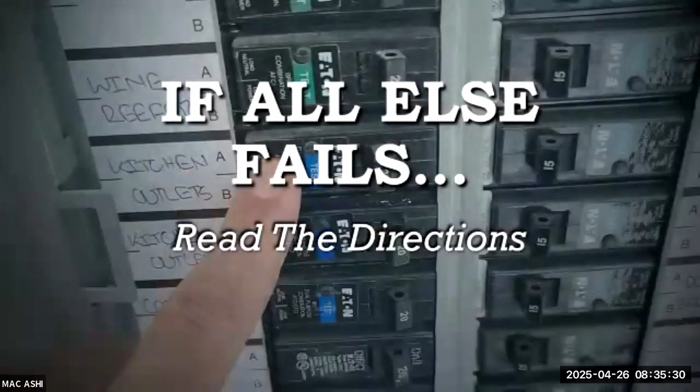I actually got this from reading the directions on a door manufacturer's set of directions. And I thought that was so funny. And when I told my wife about it, she was like, well, hopefully there's no men sitting in the class. Right? Men don't read the directions on things. And I don't like to read the directions on things either. I like to just do stuff. I assembled one of these today, and Hollis was like, oh, you installed it backwards. Hollis, should the PowerPoint be on this one as well? Okay, cool.

So anyway, the directions. Who here reads directions? Okay, show of hands. Yeah, when you have to. One common debate in home inspection is, do you do on-site reports or do you do them back in the office? One of the big reasons I like to do them back in the office is I find a lot of the time I want to look something up, whether it's a code or an installation guide or something. So I find reading the directions has helped my business, has helped me be a lot more accurate and find the answers to things.

So we'll go over some goals here. What we're trying to accomplish here this morning is learn examples of installation requirements for systems frequently seen on inspections and gain familiarity with reading manufacturers' installation requirements.

I have noticed, you guys know Mark Parlee, the building consultant, great guy, awesome speaker. I went through an adhered manufactured stone veneer manual with him, and he was so good at reading it. He was better than I was because he's been through all these lawsuits, he's combed through them. I must say, reading directions to me is a skill. You would think anybody can do it, but the more you do it, the faster you are at finding the places you want to find.

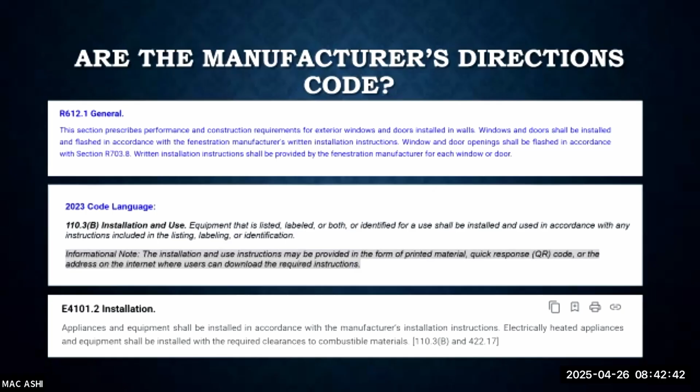Yep. So instead of the township stepping in or the code inspector stepping in and saying, this is how it has to be done, they're saying, just do it the way the manufacturer said. Yes. So the question that has come up often is, does that suggest that we know more than the township because they're just saying, just do it the way the manufacturer recommends? So it was an argument that has come up several times, and I'm just curious to know what your thoughts are.

Yeah, so the question, to summarize, I think, is that you can get in this trap where the builder will often say, well, the county approved it, or the so-and-so approved it, so that means it's code. I kind of bow out of that. I mean, if it's in writing, this is exactly why I would go to the directions. If they want to say that, that's fine, but I can back my opinion up in writing, and they probably can't. So one of my favorite things, whenever it gets controversial and people push back on you, is like, we'll put it in writing.

I did a deck that needed to be rebuilt, and the seller got an engineer to tell me what a great deck it was and that I was a complete moron, that it was the best deck he'd ever seen in all his years of engineering. I said, well, I'm sorry I made such a terrible mistake. Why don't you put this in writing with your engineer's stamp on it and send that to my clients? Oh, well, I'm not really an engineer. And the whole thing just kind of melted and fell apart. So that would be my suggestion if that comes up.

That's the whole point of these directions, is you're backing it up with something that's in writing. Yeah, I've been successful with directions, and products can fail.

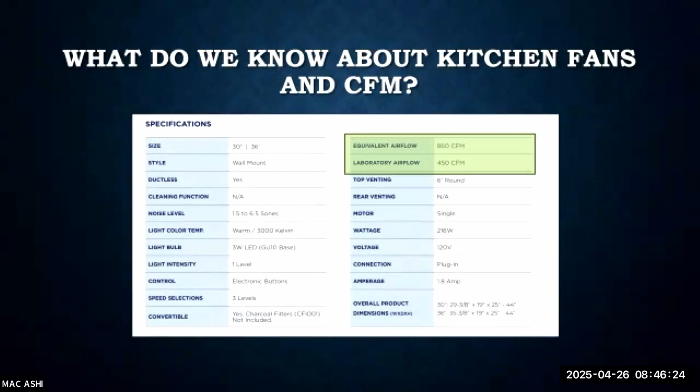We all know what was happening, right? We were depressurizing the house, and so I went and just snapped a picture of the data plate, and I went and looked up the specifications on the internet. It was laboratory airflow 450 CFM, so it certainly had the potential to be over 400 CFM, which is the modern code.

So here's like a trap, right? My mentor, when I got started, said when you're an inspector, you're walking through traps all day long, and the better you get at it, you learn to tiptoe through all these little pitfalls. But it's kind of tricky on a 1980s house to apply modern code to it, isn't it? Right, so you can't really do that.

So in my report, I listed it as a due diligence item, but at the same time we were having a problem—this is an 80s condo, they weren't bringing in makeup air. So you turned the fan on, it depressurized the building, and you started pulling air down the chimney into the building. This is why we changed the code.

So it's kind of cool when you actually see the evolution of why we make codes and why we change these things—putting the unit under negative pressure is not really great for it. I don't know what they ended up doing with that, it was just this little rabbit hole I went down. But I was able to use the code and the data plate to make my point—this is why we do this today. And if you don't want to smell your fireplace, you might need to think about doing makeup air.

So anybody use due diligence in their reports? To me, it's a way when it's not really clear—it's like, well, you can research this yourself and figure out what you want to do with it. Maybe you love the smell of creosote in the morning and you're okay with it, or you don't use the fan, or there could be a lot of reasons. So to me it wasn't necessarily a repair item, but I wanted to be clear about what was happening when you smell the fireplace.

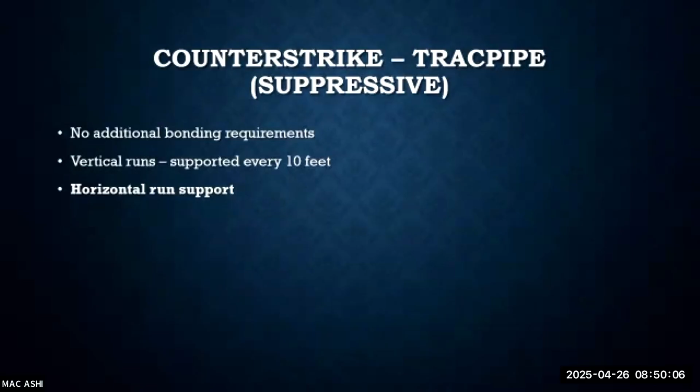So the CounterStrike made by TracPipe is the suppressive, no additional bonding requirements, vertical runs supported every 10 feet, horizontal runs as well. So support is something I often see inadequately done on CSST, and you can look in the directions and see how frequently you're supposed to support the CSST.

So this is where things get tricky, is minimize removing the jacket. So using a utility knife, strip back the jacket, see the table. Care should be taken to minimize the amount of jacket removed. How often do we see lots of the jacket removed? More often than not, right? How do we know they haven't removed the jacket in places we can't see it? No clue, right?

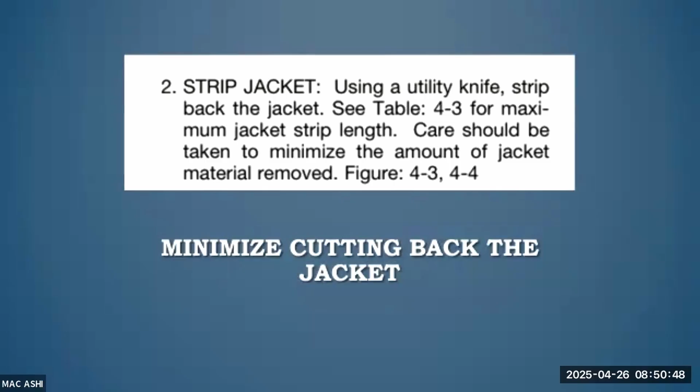All right, so here's a picture of that TracPipe. This is a really interesting one. Exposed stainless steel that may come into contact with spray foam insulation must be wrapped in self-bonding silicone tape. Are we going to see that one? No idea, no clue, right? But this is a really interesting thing.

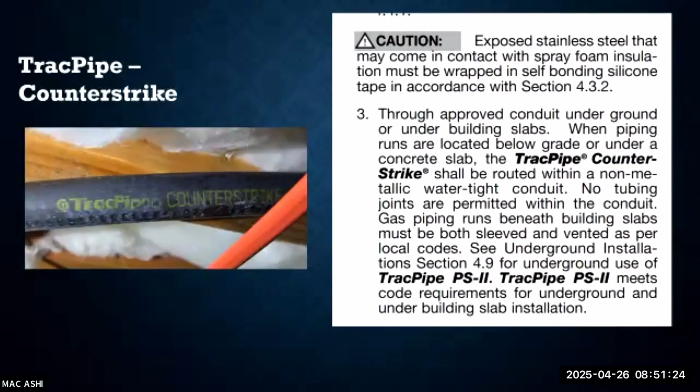I partly bring this in about reading the directions because now when we show up at a house, there's like millions of products and they're all layered on top of each other, and we don't always know whether they're compatible with each other. So compatibility is one of those things that I'm actually kind of often scanning for when I am reading the directions. So I thought that was an interesting one. Probably not much help because we can't see that, but I thought that was sort of interesting.

So it runs through approved conduit where underground. So if you're running this stuff underground, runs located below grade or under a concrete slab shall be routed through non-metallic watertight conduit. So if you are seeing this run underground, you can open the directions and see what it says about how you're supposed to run this underground to make sure it is done correctly.

It can be installed outdoors, but protected from physical damage and not buried directly in the ground. Don't know what's going on with my audio there. So this is interesting. TracPipe CounterStrike jacket is resistant to UV and able to withstand exposure to long periods of sunlight.

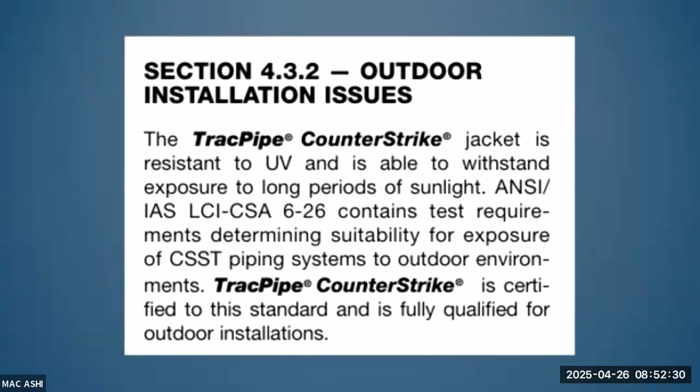CSST in outdoor systems is certified to the standard, so it can be installed outside - that's basically the gist. It's not subject to physical damage when it's on the outside. So if you see CSST that could be physically damaged, this is where you'd find in the directions the proof for your point.

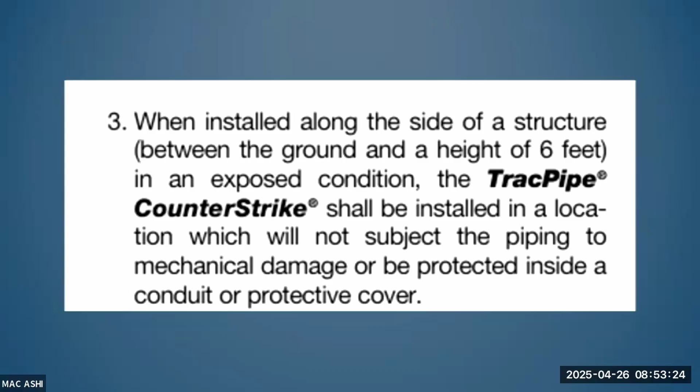Have you guys ever had the occurrence where you're inspecting and something just intuitively doesn't feel right? You think somebody could drive their car into the CSST. If you just say 'I don't like this,' you're defenseless if somebody pushes back. Whereas if you open the directions and read them, copy and paste that little nugget in, then you've got the directions backing you up. They provide great cover for you when you have these opinions.

So I hope that helps - I'm just giving examples of how you sift through and find these little nuggets. This was an inspection I did, and I noticed yellow CSST that wasn't sleeved very well. So I went and found the manufacturer - this is from Gas Tight.

Masonry material is defined as including but not limited to brick, concrete, mortar, stucco. When necessary to install Gas Tight through masonry, the tubing should be routed through a conduit that is half inch larger outside diameter than the CSST - basically it should be sleeved. So clearly, based on the directions, what I saw seemed wrong.

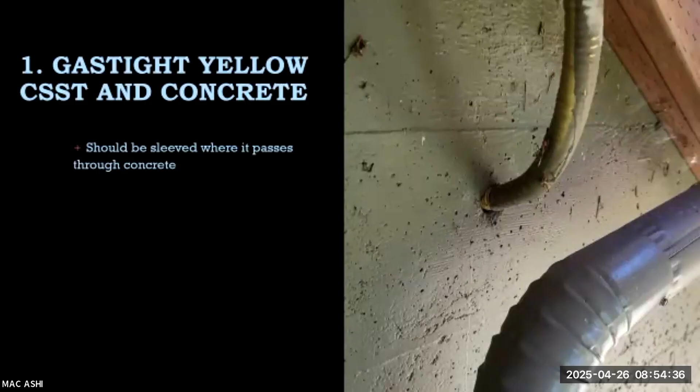I do think this varies per manufacturer, so I can't stand here teaching that whenever CSST is in concrete contact it's wrong, because some manufacturers may allow it. That's why I thought CSST was interesting to go through - unfortunately if you really want to get it right, you have to look the directions up. It's too complicated; you can't just memorize one set of rules and assume it's all the same. I wish things were simpler, but anyway - half inch larger diameter sleeve.

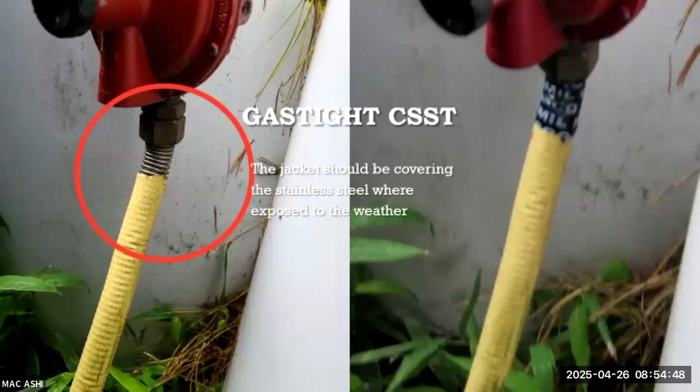You must run into this a lot, right? On the exterior, when you see CSST, they've often stripped the jacket, and it should always be covered. That's actually universal in every set of directions I've read - though you might want to confirm, since I can't read every manufacturer's directions. But from what I've checked, every manufacturer says if CSST is on the exterior, you've got to cover that stainless steel. That's an easy fix. But you guys see this a lot? I do where I am. This comes up all the time. Yep.

The TracPipe jacket is resistant to UV. When installed outdoors, the plastic jacketing shall remain intact as much as practical. Any portions exposed shall be wrapped in self-bonding silicone tape. So they've told you exactly how to fix it.

This is the kind of thing I don't have to look up every time - to me, this is why God made software. I can find this stuff, look it up, put it in my template, and now it's there. I've snipped the directions in, and once you look these things up once and use your inspection report software to store all this information, it makes me smarter, faster, and more accurate.

That's a really important component of using the directions - I don't have to look it up every single time. I got in the habit years ago of reading these things, and I've accumulated this knowledge. What that means for me as a home inspector is now when I go out in the field, I have a second brain on this device. It's got all these little clips, all this knowledge built into my report template, and I'm smarter than somebody who hasn't done this.

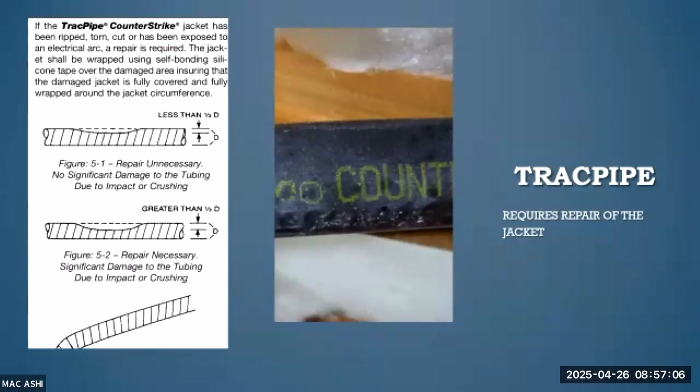So CSST special bonding - I like to call it special bonding because gas piping always requires bonding per the National Electric Code. All metallic systems in the building need to be bonded. For the most part, the steel stuff was all done at the appliance. If you connected it to a furnace and it had a grounded circuit, then it was all part of that bonding system. So the gas pipe didn't require special bonding.

The CSST, which is arguably, in my opinion, just a lousy product, now requires special bonding. And the frustrating thing is, who installs the bonding? Probably the electrician. Where is it in the NEC that they should be doing this? Nowhere. So you have a subcontractor in charge of installing bonding for a material that has absolutely nothing to do with the National Electric Code. A lot of electricians push back on it and don't know about it or don't care. So you have to try to get the electrician to care about gas pipe, right? That's kind of frustrating.

But the yellow CSST should always be bonded with number 6. Counter-strike, the suppressive type, does not require special bonding, but you have to repair the jacket. And to me, if I were king, I would make all CSST have to be bonded because I can't tell whether the jacket's damaged somewhere. You can only see a tiny little part of this stuff, right? So this is a needle in a haystack for us.

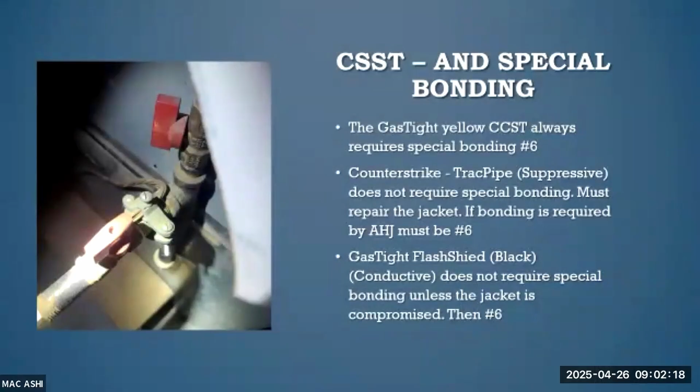Hey, we're doing pretty well with CSST, right? So far, so good. All right, cool.

This is just a picture of the FlashShield, the conductive type. It has this sheathing that goes on it, which is how you can tell it. Sometimes you see cool illustrations in the directions that help you understand how the product works. This is a cool illustration showing that metallic shield meant to go over the flash shield stuff. I like the directions because they help me learn more about a product.

Who here knew there was a conductive and a suppressive type, or whatever those two types are called? I saw black CSST for years before I understood there were two different types, and I figured that out by reading the directions. You learn stuff when you start digging into these things.

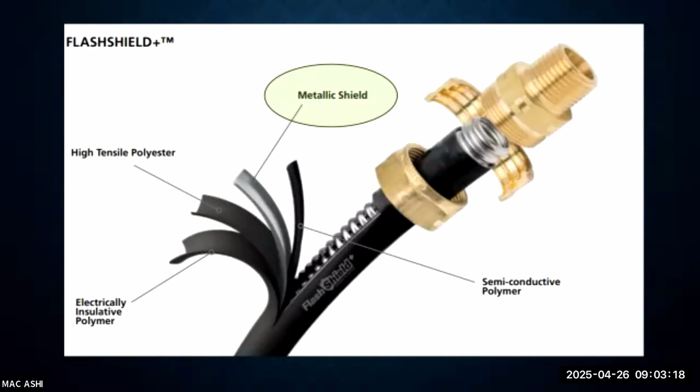And this is the gas tight. They've got all kinds of stuff on the special bonding that's required, and they're showing the clamp and so forth.

If a tear in the outer jacket is less than half an inch in length, gas tight recommends wrapping the tear with electrical tape or self-bonding silicone tape to protect the metallic shield layer. If the metal shield layer tears greater than half an inch, it must be cut and replaced using appropriate methods. The affected area of greater than half an inch metal shield tear cannot be cut out and replaced. The system shall be treated like yellow gas tight with regard to isolation and separation requirements. So if you have damaged this metal beyond half an inch, it should be treated like the yellow and bonded with the yellow CSST. I'm just trying to show you where I found this stuff and how I came to my opinions about this. Good little nuggets.

This is an interesting one: it must only be installed by an installer who has successfully trained through the FlashShield training program. That can be really helpful, right? If someone's pushing back on you, has anybody seen some of these where they're not sure they've taken the class? I've definitely seen some of that. So you could put this in your comments. I don't think I have this in my library yet, but that might be something I could add to my library of pre-made CSST comments.

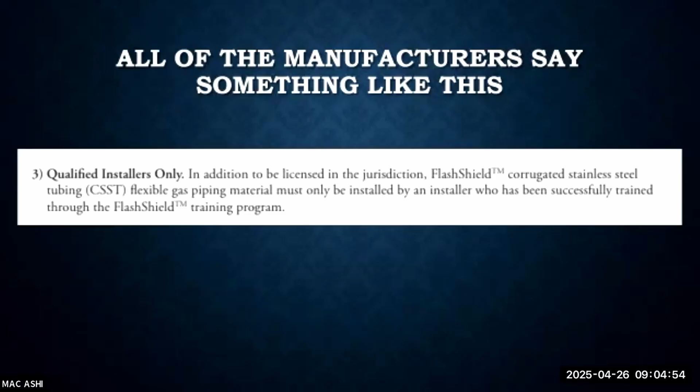How about that? We made it through CSST. Did everybody survive that? Cool. Yeah, good stuff there.

So, error codes - who looks up error codes when they see them on appliances? This is an easy one, right? It's just sitting there, sometimes flashing at you. It's like the appliance is telling you something. Let's look it up and figure it out.

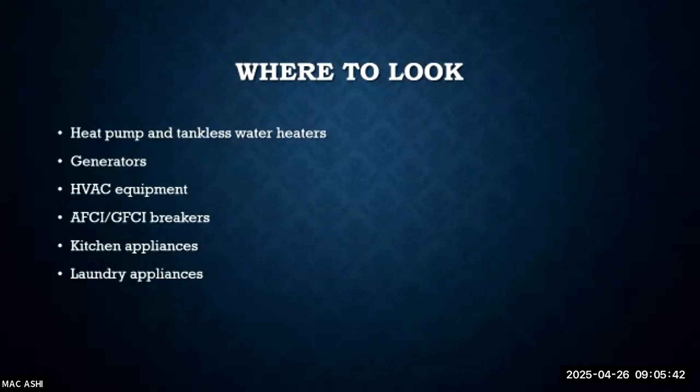Different appliances where I'm looking for error codes: heat pump and tankless water heaters, generators give you error codes, HVAC equipment, AFCI and GFCI breakers, kitchen appliances, laundry appliances. Anywhere you see any kind of LED light, sometimes they're just flashing in a sequence, sometimes it's a display with some weird gibberish, but either way you can look it up and see what it's trying to tell you. They often are completely inscrutable - I don't even know what the heck this is, but I saw that and thought to myself, something might not be right.

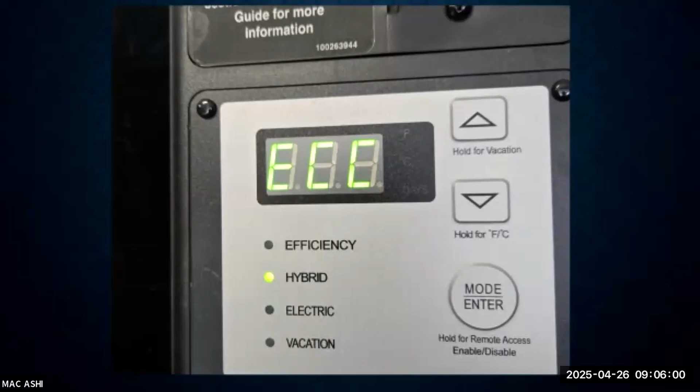So I did the unusual thing of looking it up and found the directions: ECC, heat pump compressor is not functioning. That's a pretty good thing to know, right? That'd be a bad one to miss and then have the client move in and find the heat pump not working on the water heater.

You guys have heat pump water heaters out here? We have quite a few of them. I like to get a video of the compressor running, so I go in and run hot water until that thing kicks on, and I have a video of the compressor running to prove it was working when I was there.

I'll even put it in heat pump mode, because sometimes people have disabled it and it's not in that mode. So I put it in heat pump mode and turn on hot water to see if it's running. I can obviously tell the water heater is making hot water by testing the temperature, but with these I like to make sure the heat pump itself is working.

You guys see that? Good little tip, can kind of help save you. I've found a lot of these not working over the years where there's hot water, the elements work, but the heat pump part of it is not working, or at least didn't respond to my operating controls. I might not say it doesn't work.

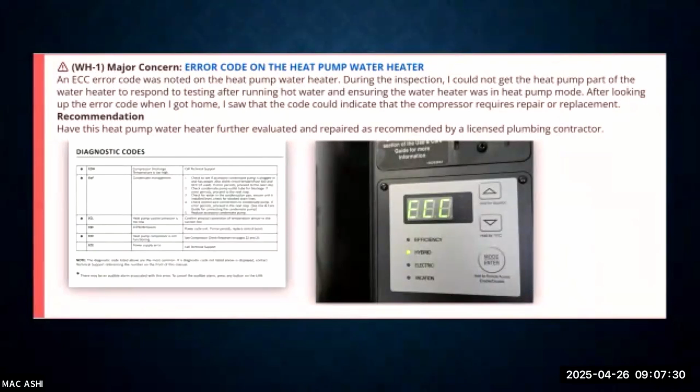But in this case, it was a slam dunk. I just got a screenshot of the diagnostic code and put it in, and the client was really grateful that I found the heat pump wasn't working on the water heater. I fussed about this one because I couldn't get it to come on, it gave me the error code, and I thought they should have it fixed.

Composition roofing. I've been driving around since I got here and I can tell you guys have composition roofing around here. Let's dive into this one. So this is one of my favorites.

Remember we talked earlier about the idea that you go out and it doesn't feel right. Who here feels like it doesn't feel right when the upper downspouts drain onto the lower roof? About 50%, something like that. Anybody been to the Grand Canyon? Water is some ornery stuff, man. You do want to control that, and running it onto the roof will damage the shingles prematurely.

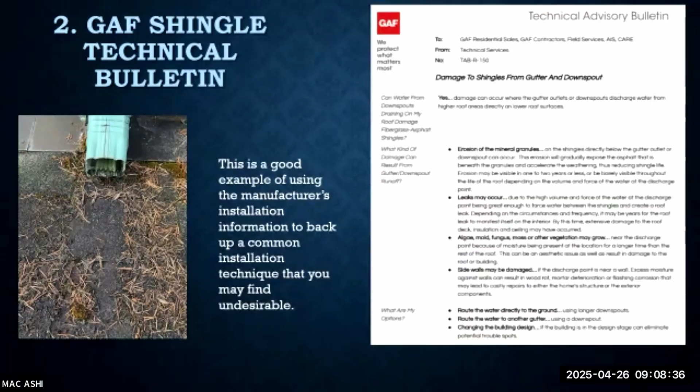So the problem is, if I call that out and say you should fix this, do I have any real backing for it in the building code? Not that I can find. And if you go to a new construction cul-de-sac development, every single house has the upper downspouts draining right onto the lower roof. So you're tilting against windmills here, you're Don Quixote out in the wilderness with nothing to have your back.

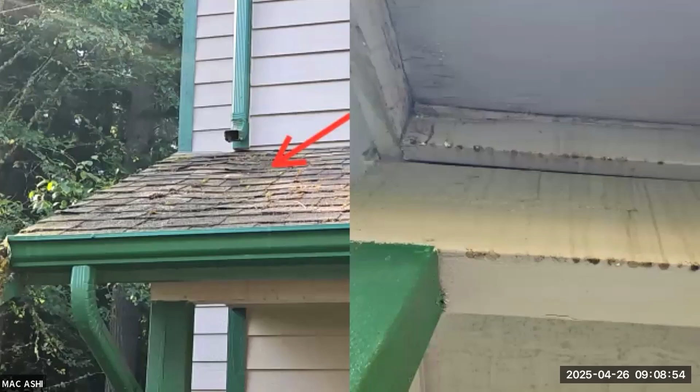My buddy Charles Buell made this nice illustration I love. We include those in our software, Scribeware. But I always have that in my comment. This isn't my first rodeo, I've done this a lot. I know what happens if you let the upper downspouts drain onto the roof for 20 years - that becomes the first place the roof fails, isn't it? Am I wrong? Right, so I know this.

So when I see this and it's not bad, I'm going to use GAF's technical advisory bulletin. Most manufacturers have technical bulletins you can find that are really helpful, and in this case their technical advisory bulletin is actually worth reading.

The shingles directly below the gutter outlet or downspout can erode. This erosion will gradually expose the asphalt beneath the granules, accelerating weathering and reducing shingle life. Erosion may be visible in one or two years or less. Leaks may occur due to the high volume and force of the water. Algae, mold, fungus, moss, or other vegetation may grow near the discharge. Sidewalls may be damaged if the discharge point is near a wall.

So GAF kind of has my back, doesn't it? I look at these things as people that have our back - we want to say this stuff, but we don't want to be out in the wilderness, this Don Quixote tilting against windmills.

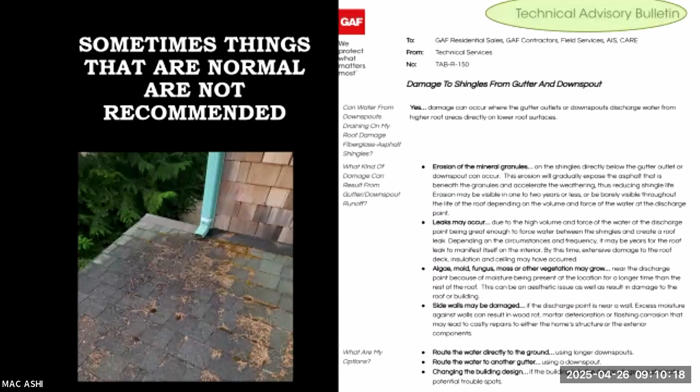I've only seen this like 3 times in my life, but I have seen it out in the wild. And you know who installs these? The people whose last roof looked like that. We learn by pain, right? That's how humans learn. In my experience, the clients that actually extend these downspouts had a roof that failed prematurely, and we're like, yeah, we're going to do this.

I see a lot of them where they'll run the drain for the condensate into the spouting up top, and it runs down across those shingles too off of that drain, and it really eats up the shingle. That condensate water is acidic, so it really eats it up. On an attic mounted unit, they'll run it into the gutter, then it runs down across those shingles, and it eats them up.

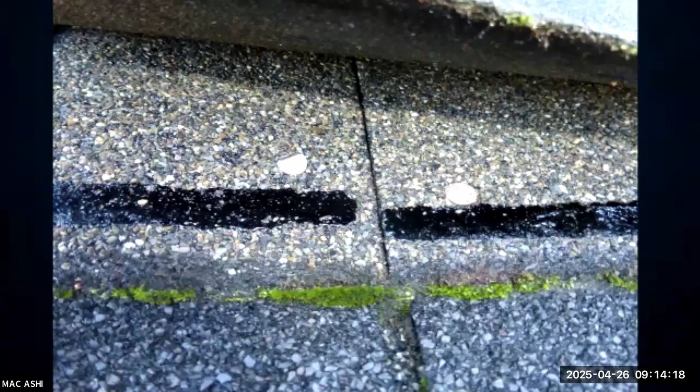But there is a little fastening strip where the fasteners should be located. This is how they most often look in my experience, where they're high fastened, because they don't want to have shiners - so when in doubt, they put them too high on the shingle.

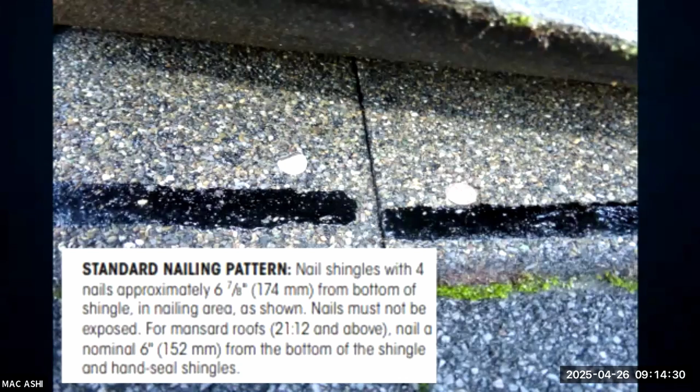Nail shingles with 4 nails. They give you the size of the nails and how far up from the bottom of the shingle. In the nailing areas as shown, nails must not be exposed.

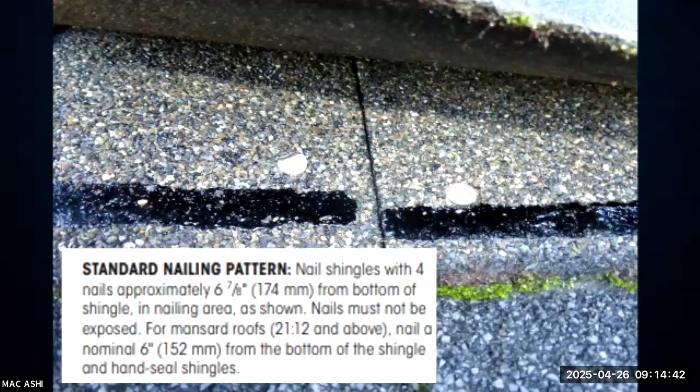Staples were phased out in 2003. Does anybody build that into their report template? I can put it in my template and type in the word staple and it pops right up. That helps me date a roof, since it tells me roughly when it was installed. Most likely, if I see staples, it's older than 2003.

Do you guys see stapled comp roofs here at all? A little bit, but they're kind of going away because that's getting to be a pretty old comp roof, so I don't see them much anymore.

Question in the back: it's hard to tell what manufacturer it is. A lot of times I'll go to the association rather than the general manufacturer, because most associations have installation guidelines that cover all their members. You're talking about the Roof Manufacturer Association? Yep.

Vinyl siding has their own association. The peel and stick companies have their own association too, and all of them have details that all their members agree on. It can get confusing, can't it?

With adhered manufactured stone veneer, there's a nationwide manual I like a lot. But what I've found is that the actual product can differ from the national standard. So I'd argue the product probably trumps the national standard, since that's what you're actually using. I'd be careful with that, because I got into trouble with it on the manufactured stone veneer side.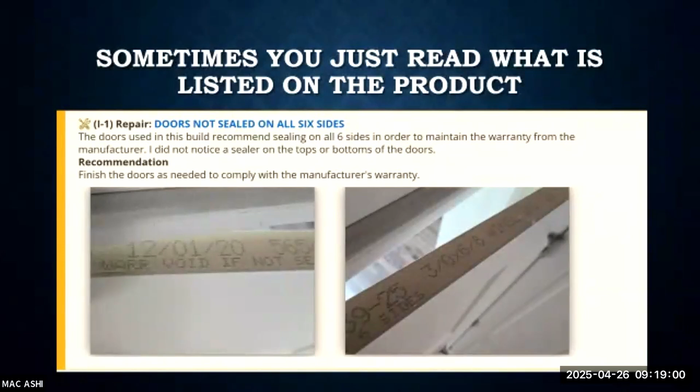But particularly on a new build, I don't usually call this out if it's not a new build, just because I figure no one's going to pull all the doors off and redo it. I'd make a note of it maybe, but I'm not going to call it a repair item. But if it's a new build, it says right on the door to do it, and they didn't do it.

So I don't know, I call it out. Did anybody else call this out? Yeah, I got a couple hands. I don't know, it would look embarrassing if the door is warped and your client read that and was like, how come you didn't say something about it?

So you must have propane here. Guys, not everybody's a urban city person, right? You live out in the country here, you got pieces of land.

So secondary pressure regulators, I didn't even know that was the name of this thing for a while. That was like, oh okay, they call it something that I didn't know. I thought this was really fascinating, not the California cancer thing, but things to tell the gas customer.

I bet that never happens, but this is what the manufacturer put in here. Show the customer the vent assembly and vent lines. Stress that this opening must remain unobstructed at all times. Tell the customer to check the vent opening after a freezing rain, sleet storm, or snow to make sure ice has not formed on the vent. Show the customer the shutoff valve on the container. The customer should close this valve immediately if gas is smelled, appliance pilot lights fail to stay on or appear higher than usual, or any other abnormal situation occurs. Tell the customer to call your company to service the regulator if the regulator vents gas or a leak develops in the system. Only qualified people should work on it.

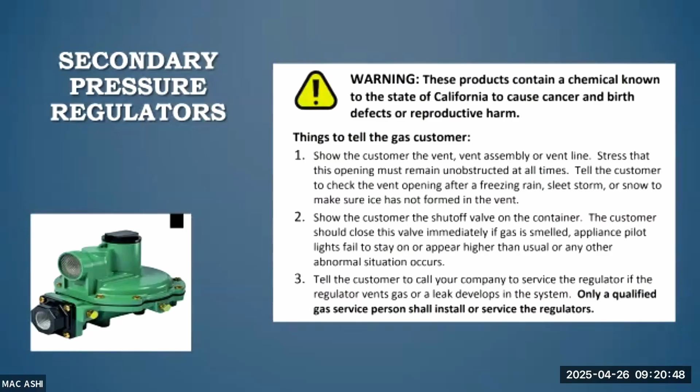Well, that could be helpful, couldn't it? I don't know, I thought it was really interesting that that's in there.

This is pretty cool, who thinks of these as having a service life? Who knew, right? Well, if you read the directions, 25-year recommended replacement life. So there's a life to them, they recommend replace them every 25 years. That's their design of corrosion-resistant materials, both internally and externally, with proper installation. They will meet a 25-year recommended lifespan.

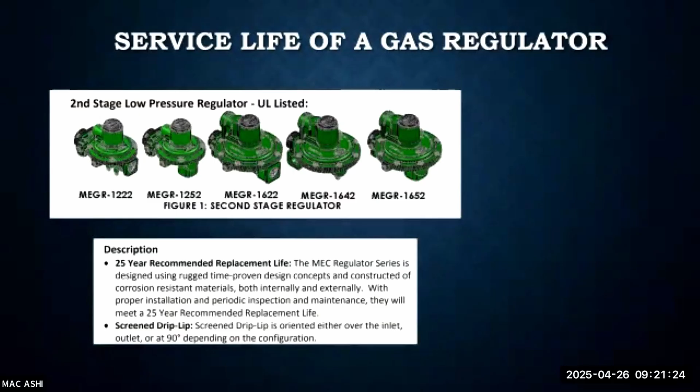Screened drip lip is oriented either over the inlet. Yeah, that's not it. But anyway.

This is a really good one that I see wrong all the time. Install the regulator with the vent pointed vertically down. You guys see this not done correctly a lot? Maybe you don't look. Who knew, right? If you read the directions, it's like, wow, I can't believe this, this is something I should have been looking for and I wasn't. So install the regulator with the vent pointed vertically down. If the vent cannot be installed in the vertically down position, the regulator must be installed under a separate protective cover. Installing the regulator with the vent down allows condensation to drain, minimizes the entry of water or other debris from entering the vent, and minimizes vent blockage from freezing and precipitation.

Cool, I learned something new, right? Again, I hope this is helpful for you guys, but I didn't know any of this stuff, right? Nobody teaches it in the schools really. And so you read the directions and you learn all these things.

It's fascinating to me. Install the regulator so that any gas discharge through the vent or assembly is over 3 feet horizontally from any building opening below the level of the discharge. Below the level of discharge, that's an important one, and not less than 5 feet in any direction away from any source of ignition, openings into direct vent appliances, or mechanical ventilation air intakes.

So clearances can get really confusing, can't it? I mean, sometimes you have a secondary pressure regulator, a direct vent water heater, a direct vent furnace, a crawl space opening. So we've got 3 manufacturers, we've got the building code, all of these things start layering on top of each other. I've definitely had a few houses where I'm like, I really have no idea what's right anymore, because you've layered so many different manufacturers on top of each other. And who starts taking precedent over who?

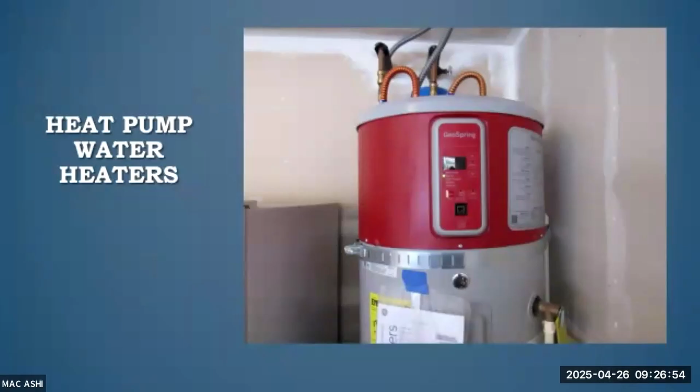Heat pump water heaters - we went over the error code earlier, but I'm glad you guys see these. In location requirements: indoors, so you can't install them outside, vertical and level, that seems fairly intuitive. Unrestricted airflow - they want at least 750 cubic feet of space, roughly 10 by 10 by 8 feet tall. So if it's in a small closet with no makeup air, there's probably not enough air for that heat pump to work right.

Minimum 6-inch clearance on all sides. I very rarely see that, right? They're often up against a wall. Who's going to move that? These are the traps we run into. People get kind of tired of us being picky, but this is a home inspector trap. It says there's supposed to be 6-inch clearance on all sides, and there isn't. I don't know, do with it what you will, but it's right in the directions.

Not subject to freezing. That's kind of interesting. If they're in a garage, which is a good location for them, they could freeze where I am. It's funny, I was just down in Arizona, and nobody puts heat pump water heaters in Arizona, which might be one of the strangest things I've ever heard. I was like, there's so much free heat down here. Why in the world aren't you using these in Arizona? Plus it'd cool your garage for you, so your garage isn't like 150 degrees. But anyway, they don't do them down there.

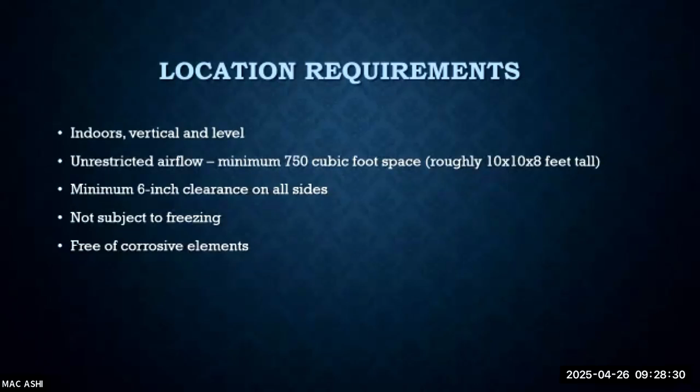Free of corrosive elements, so that's kind of interesting. What if you saw one next to pool equipment, or next to spa equipment? It would actually be right in the directions that you shouldn't install it with that stuff nearby.

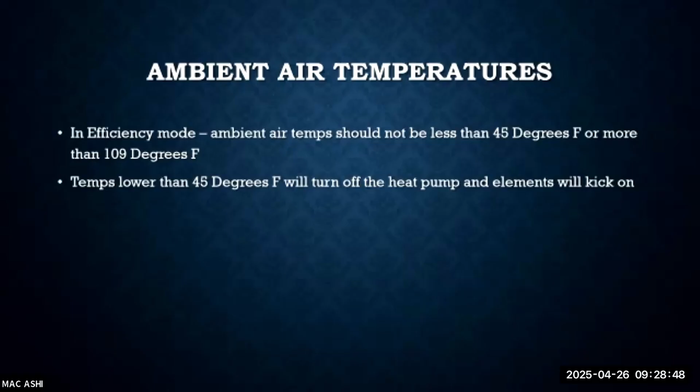Ambient air temperatures. In efficiency mode, the ambient air temperature should not be less than 45 or more than 109. Maybe that's why they don't install it in Arizona, it's too hot for them. Temperatures lower than 45 degrees will turn off the heat pump and the elements will kick on.

Not subject to physical damage by cars. What do you guys notice about this slide that I took right out of the directions? The water heater, shouldn't that be 18 inches off the ground? Yeah, that's kind of interesting, isn't it? The water heater's right on the ground in the garage, not 18 inches. What else?

There's no bollard, they just have like a little curb thing. So it's interesting, the whole bollard thing, I could probably add that. That'd be another one, this was fun. I could teach this class and come up with like 30 more things every time I teach it. But bollards, who makes the bollard, what are their directions, and what does the code say about them? The code is very unspecific about bollard installations unless it's commercial. On the exterior of commercial buildings, those bollards have to be dug into the ground and reinforced with concrete and all kinds of very onerous requirements. But in general, in your garage, they don't seem to.

Does anybody kick bollards? Charlie Buell taught me to do that. He was like, I kick them. I'm like, oh, that's probably a good idea. I've kicked a few and had them come right out, you know? So do what you will there. But anyway, I just thought that was interesting. They're not really specifying a bollard, but the water heater shall be located so it's not subject to physical damage by moving vehicles. So a bit of an interpretation there.

Confined space requirements. So if you do find one in a closet, they've got all kinds of little things you can read about this. Heat pump water heaters covered in this manual require a minimum of 750 cubic feet. We did that. Inlet air will be delivered from an alternate location inside the building structure, through one or more louvered grills or through a fully louvered door leading to the conditioned space. The alternate location from where inlet air will be delivered must provide a minimum of 750 cubic feet.

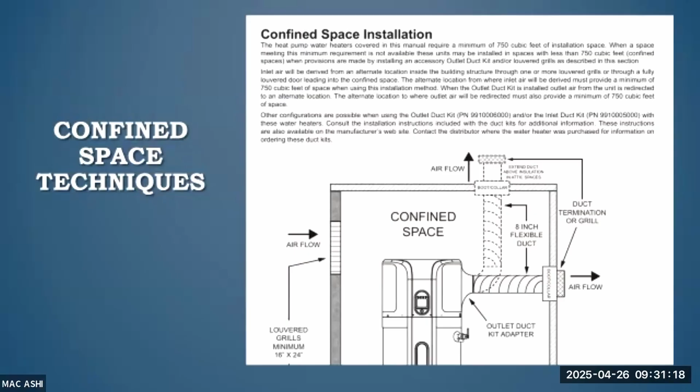Anyway, they've got all these directions for bringing in makeup air. Do you guys ever see the makeup air vents on these? Every once in a while I do, but they're pretty rare. They're usually just plopped in there. And to me, they don't really make a lot of sense putting it in a conditioned space, really. You're just robbing Peter to pay Paul. I don't understand the efficiency benefit there. To me, the whole point of a heat pump is I want the free heat that's on the outside of the building. So I don't know why they wouldn't all come with a vent to the exterior, but nobody asked me when they made these.

So that's how they are. There's some stuff about installing a shutoff on the cold water side. Oh, all right, sorry, water piping, there's a whole thing here. So 3/4 inch. You guys ever see 1/2 inch pipe to the water heater?

Sometimes you do, and they put a little reducer to it. So 3/4 inch, they're saying right in the directions. Mixing valves may be required by local codes. A pressure reducing valve may be required per codes on the cold water inlet. Install a shutoff on the cold water side.

Thermal expansion may be needed if it's a closed loop system, right? So sometimes we wonder about requirements for expansion tanks or some type of thermal expansion. If it's a closed system, some type of thermal expansion might be needed.

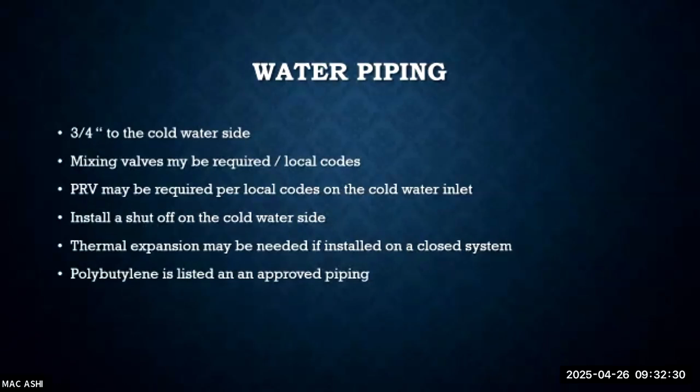And I thought this was interesting, the system should be installed only with piping that is suitable for potable water, such as copper, CPVC, or polybutylene. So inadvertently, the water heater manufacturer seems to think polybutylene is okay. Isn't that weird, the stuff you find in these directions. When you start reading the directions more, I've started to wonder, well, who's writing these and how much do they know about all this stuff, right? You sometimes get some head scratchers.

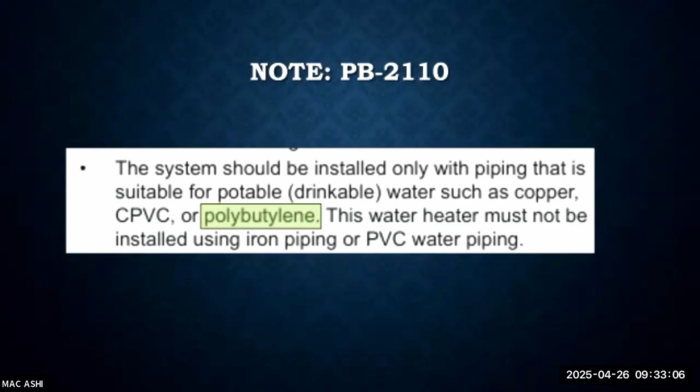Notice how it does not allow for PVC water piping. So there's another place that, for obvious reasons, right? But another spot. And when you read the directions, you get all these cool little illustrations that you can start picking apart. I don't think I found any particular wisdom here. There was all kinds of interesting little things, like in Massachusetts they have special requirements for vacuum relief and stuff. So I don't know, you can see how much fun I am of what I do on my spare time, and I think it's interesting. I think this stuff's cool. So I read a lot of these things.

If an adequate drain is not available for condensate drain lines, then a condensate pump must be used. Do not discharge the condensate drain lines into the metal drain pan.

So somebody brought up condensation earlier, thank you for that. And here you can see they're specifying.

I did an inspection on a new build. I did the new build when it was brand new. And then I did a one year, they're actually selling it, but I showed up about a year later, and the heat pump water heater was in the garage. There was a bathroom right behind it, but obviously a wall in the way. And I used my moisture meter around the toilet, and I got high moisture meter readings. I was like, toilet must be leaking. Went down in the crawl space and was like, wow, it's really wet under here. There was rot and damaged I-joists and stuff. I was like, this is a big deal. What the heck's going on?

And I figured out that I missed on the first inspection that the condensate wasn't connected. There was really no way I would have been able to find it. It actually had a discharge on the outside, but they never connected it in the wall. So for a year, this thing was just dumping condensate onto the subfloor, or basically into the wall, creating this whole water damage thing. Luckily, everybody was nice to me about it. I don't know, you can't see some of these things, so it's hard to know. But that was one of my lessons, that you really ought to try to see where the condensate is going and make sure it's connected if you can at all see that.

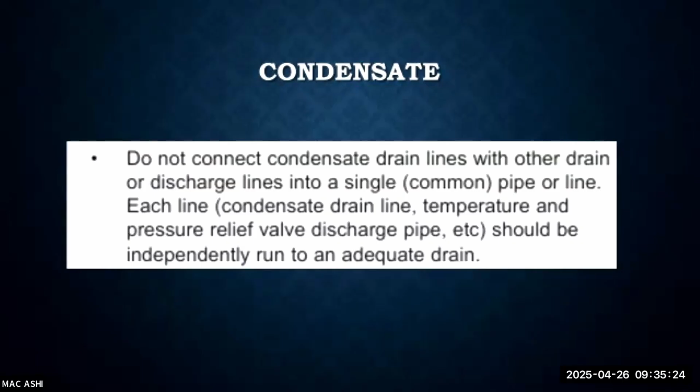If a condensate pump is installed, it should shut off the heat pump in the event the condensate pump fails or the float switch activates the pump. I don't know why I put that in here. It should shut off the heat pump, right? So those condensate pumps typically have those two extra wires on them, and if you don't connect those, then it won't shut off the appliance they're going to. That's actually something I look for and have a pre-made comment about whether those two wires have been serviced. And here the directions from the manufacturer are basically saying, hey, hook up those extra two wires, right? I should get a picture of that, put it in.

So thermal expansion in closed systems. If the temperature pressure relief valve is dripping or leaking, have a qualified person replace it. Examples of a qualified person include licensed plumbers, authorized electric company personnel, authorized service personnel. That's kind of interesting that the directions are saying who's qualified.

Do not plug the valve, do not remove the valve.

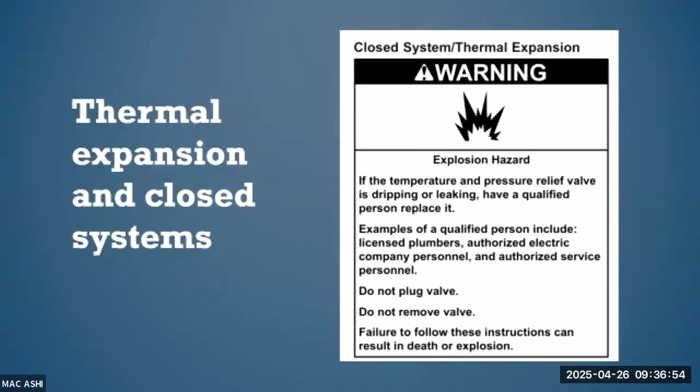Is this a good complete list of temperature and pressure relief valve discharge requirements? No, right? To me, TPRVs are just an absolute nightmare when it comes to directions and code. They're all different, and they all come with these little snippets of things, and I can't go to one place to just say here are the rules. So if you're frustrated, so am I, and we have a right to be.

On that line, it's only been relatively recently that building code standards have required thermal expansion tanks on water heaters, but they've always been required in the manufacturer installation guidelines. So I bet thermal expansion tanks are not specified, if I'm guessing. Usually when I've read the directions to all this stuff and in the code, there's a provision for thermal expansion, so there are other ways to do it. I can't remember, there's something called a Watts 80 I think it is, and that can be in the toilet, which good luck finding that. Anybody here pull every tank cover of a toilet?

I don't. You do? Nice, that's awesome, I should get in the habit of that. I do usually when there's no stuff on it, but I hate all the doilies and stuff on them, and then I get frustrated and don't pull it. But I should, I'm of the opinion that we could always spend more time doing an inspection and charge more money and deliver a higher quality service. I think that's always possible. So you could open up every tank cover.

But this is, we did not always require any thermal expansion devices until we started having closed loop systems or closed systems. So once the system is closed, which is usually a pressure reducing valve that closes it, then you start going into thermal expansion stuff. That's my understanding of it.

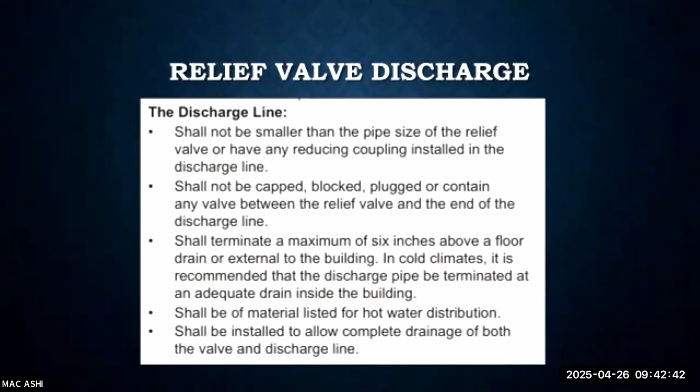I never have, except one time. This was weird. It had two 200 amp services, a big hot gutter, and two 200 amp panels. One was 208 and one was 240, which I still don't understand. I called the utility to ask about it, and they didn't understand it either.

In any event, if you do commercial buildings, who here does condos? Who does commercial buildings? If you do condos and commercial buildings, you'll find a lot of them are 208 volt. I like to test that, and you can put leads on.

Most systems, when you read the data plate, will say 240, 208. They'll have different wattage ratings and are able to be installed on both. It's actually not that hard to test. I use one of these little Fluke testers, and you put your leads on any part that would normally give you 240 volts. If it reads 212 or 206 or whatever, that's a 208 volt system.

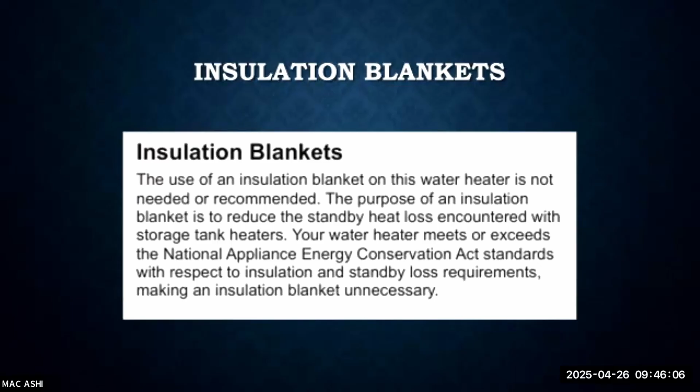I hate insulation blankets because you can never get to the data plate, and you can't see the whole water heater. So if you don't like them, you could actually look it up. I've never seen that in the regular water heater, or in heat pump water heaters, but they're not recommending it.

TPRV maintenance manually, so this is interesting. I have a note in my reports in my template that auto-populates when I inspect, when I connect and hit TPRV present, I get a note that's not totally dissimilar to this.

It's like, hey, I don't test these because they could get stuck open, but the manufacturer suggests that you, the homeowner, test these annually, which they do in writing, most TPR manufacturers that I've read. So manually operate the temperature and pressure relief valve at least once a year to make sure it's working properly.

To prevent water damage, the valve must be properly connected to a discharge line which terminates at an adequate drain, standing clear of the outlet. Discharge water may be hot.

Slowly lift and release the lever handle on the temperature and pressure relief valve to allow the valve to operate freely, return to its closed position. If the valve fails to completely reset and continues to release water, immediately disconnect the electrical power, close the cold water inlet valve, and call a qualified person.

Kind of a cool little thing, isn't it? I mean, what a nice thing that actually shows why we don't do it in the middle of home inspection, that it could get stuck open and we could have this whole mess and we have to shut down the water heater. So this thing has your back in a lot of different ways, doesn't it?

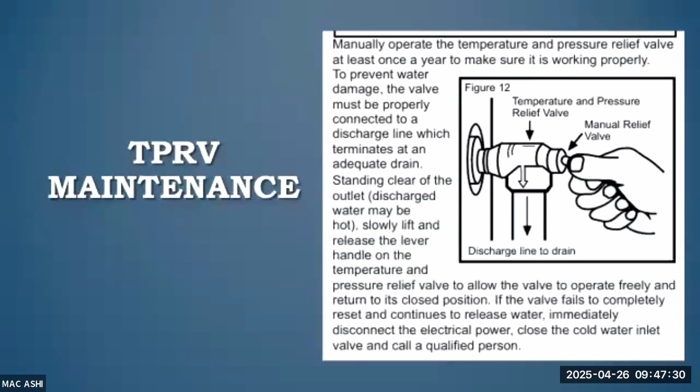It's sort of saying like, what can happen if you do test it, that you should test it, and that this should be part of regular scheduled maintenance on your building. Anybody include things like this in their report?

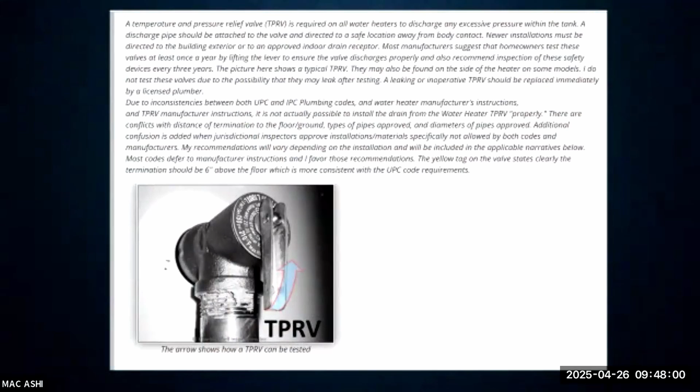I have a nice ability to have background information that is not going to the summary and is clearly not, I'm trying to teach people how to be safe in their house. So it's easy for me, this is my comment, so I have a little thing. It shows how you can test it and goes on a bit, but it's just background information. It's not going to the summary page or anything.

Draining and flushing: it's recommended that the tank be drained and flushed every 6 months. We all do this, right? I mean, my water heater is like 15 years old and I've just never touched it. I haven't tested my relief valve.

I'll go home and do it. But I'm not going to drain the darn thing, it takes too much time, I'm too busy. It's recommended that the tank be drained and flushed every 6 months to remove sediment, which may build up during operation. The water heater should be drained if being shut down during freezing temperatures.

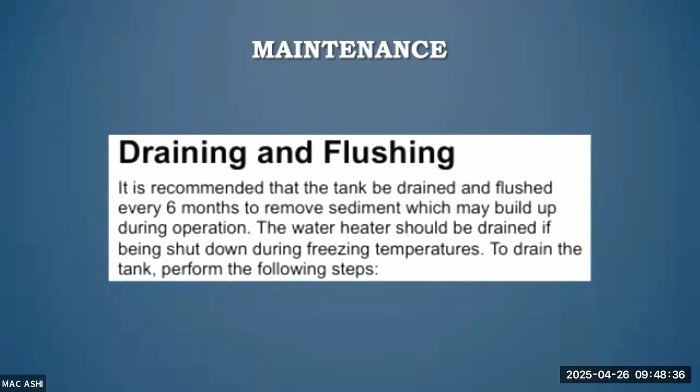To drain the tank, perform the following steps. I can't remember, I don't think I included all that, but anyway, they tell you how to go ahead and drain the tank. Alice, how are we doing on time?

How long? Half an hour? Cool.

All right, wood I-joists. You guys have these around here? Yeah, yep. I would guess, but just checking.

So there's some really good stuff in here when you read the directions. These are from Weyerhaeuser, which is a Washington state-based company. Do not cut holes into the cantilever. So that's kind of interesting.

But the top and bottom flanges are kind of sacrosanct, right? We want to leave those alone. That's kind of easy to remember. They don't want you to notch where there's load points, where they're landing on the posts. So that's something to watch out for.

I don't think I've ever found that. Anybody seen those cut? You guys have? Yeah. So good thing to keep looking for.

I mean, these are hard to inspect often because you can't see them on the second floor. There's sheetrock covering them, and in the crawl space, I have a lot of crawl spaces, so they're usually pretty covered in insulation. So I'm kind of flying blind.

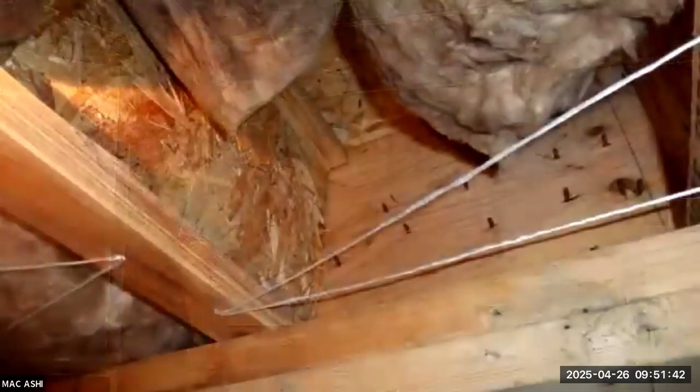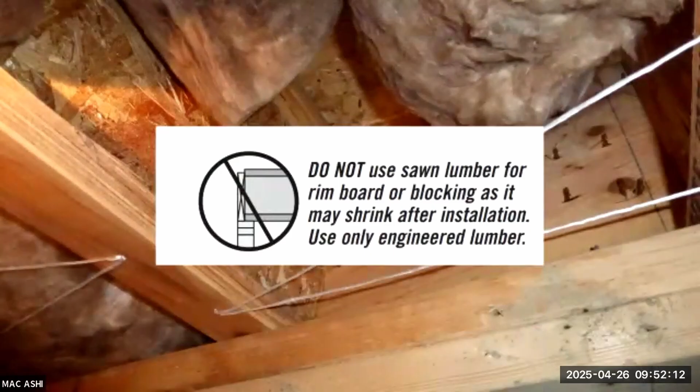Anybody see anything funny? What's that? Yeah, nominal, like sawn lumber with wood I-joist. Yeah, this is kind of a good catch. I try to check whenever I see these. If I can get to the rim joist, I try to check. Do not use sawn lumber for rim board or blocking, as it may shrink after installation. Use only engineered lumber. Would this be an easy fix for it?

That'd be a big deal, huh? Yeah, this is a good one to look for. I mean, it's one of those ones that sort of makes your heart race a little bit, like wow, that'd be a big find.

So I've seen this a couple times and I'm always like, whoo, did they drill holes in the flange for wires, or am I looking at the picture wrong? Are there wires running through the flange there? Yeah, there's no holes in it. No, there's no holes in this I-joist here.

Yeah, so anyway, the rim joist. So if you see I-joist, try to get to the rim and see if you see sawn lumber. Worth having a look.

So they have this whole TJI floor framing diagram. I think there was one thing: joists are unstable until laterally braced. And they've got, but boy, this is hard to see in a crawl space. You guys probably have a lot of basements here, don't you? Yeah, so basements, you have much more of a fighting chance of actually seeing how all this stuff's done than when it's a crawl space.

Do you guys look then for the cross bracing? Can you see that when you're doing these? I really can't in crawl spaces where they're all covered in insulation. I mean, you just can't. I try to look for the squash blocks, go to the beams and then look up and see if there's any blocks and stuff. This is hard stuff. It's hard to find for me anyway in crawl spaces. I just feel like I'm kind of flying blind.

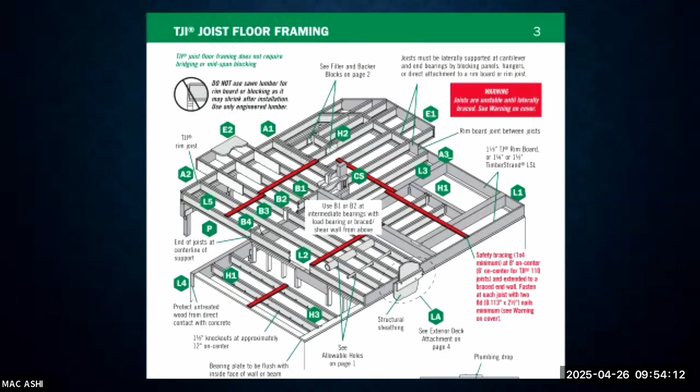I think I grabbed that, yeah, that sawn lumber thing. This is the illustration that it comes from. Do not use sawn lumber for the rim board.

So this is what I was saying, squash blocks above load-bearing walls. So if you can try to figure out where load-bearing points are, just trying to look that they actually use squash blocks, this can be kind of a tough one to find.

So wood I-joists and fire protection. This must come up for you guys a lot if you have basements, huh? You have a lot of gas heating equipment around here? Yeah, so this one's tricky. So this was a crawl space I did. They had the boiler in the crawl space. The house was built around 2000, so it kind of predated the fire code requirements for protecting wood I-joists when there is equipment.

So you guys all know about this? We can kind of go through this a little bit, but the code to me is really confusing on this. Floor assemblies not required elsewhere in this code, which I'm already confused by, to be fire-resistance rated shall be provided with 1/2-inch gypsum wallboard membrane, 5/8-inch wood structural panel membrane, or equivalent on the underside of the floor framing member. So they're basically saying you have to have fire protection, and then they back their way into where it's required or not with exceptions. Does that make sense?

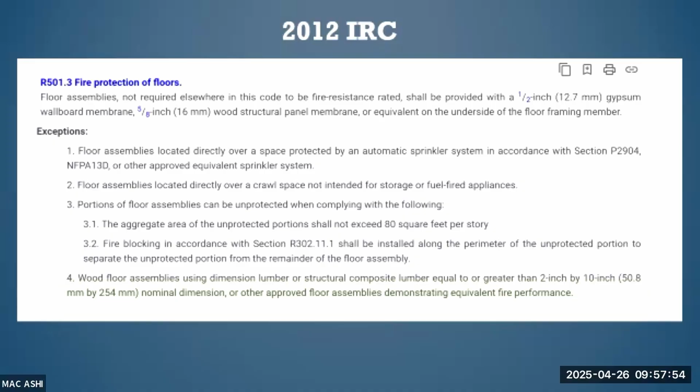So here's straight from Weyerhaeuser, satisfying the code for fire protection requirements: TJI joists with Flak Jacket protection have been discontinued. So has anybody seen this stuff? I haven't because I don't see it much. So you guys have, what do you say about this stuff?

That it's not approved anymore and they should have the manufacturer take a look at it. Anybody else have—I mean, you have something built in your template for this stuff, or this seems so... Well, let's read it.

It's been discontinued due to recent customer feedback regarding an odor in certain newly constructed homes. The issue is related to a recent formula change to the flak jacket coating that included formaldehyde-based resin. The issue is isolated to flak jacket product manufactured after December 1st, 2016, and does not affect any of the company's other products. To learn more about flak jacket protection, I think they have a link you can click on.

TJI joist with gypsum: installing a gypsum membrane to the underside of TJIs meets code requirements for fire protection of floors. This makes TJIs an excellent option for basements that will be finished. TJI joists are engineered for superior performance, with several joist series and a variety of depths to choose from, blah blah blah. So anyway, I have not seen this flak jacket protection, but that seems like something you'd want to build into your template, know what it looks like, and look for it.

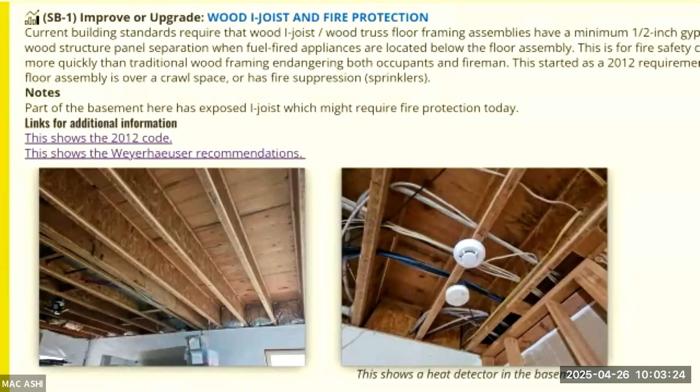I know you're not really supposed to put code in reports. I've never had it bite me in any way. But a lot of the wisdom from lawyers is that you shouldn't ever quote code, because then everything in your report has to be in code, or that's sort of what I hear. I've never had anybody prove to me that an inspector's gotten in trouble for that, but that's what you hear a lot. So I'll let you make your own business decisions on that.

All right, clothes dryers.

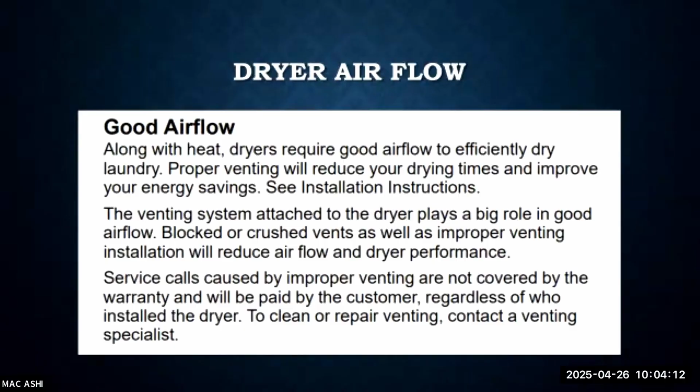Good airflow, along with heat, dryers require good airflow to efficiently dry laundry. Proper venting will reduce your dry times and improve your energy savings. The venting system attached to the dryer plays a big role in good airflow. Blocked or crushed vents, as well as improper venting installation, will reduce airflow and dryer performance. Service calls caused by improper venting are not covered by warranty and will be paid by the customer regardless of who installed the dryer. To clean or repair venting, contact a venting specialist. So kind of like somebody brought up here, if you don't do it according to the directions, the manufacturer is not going to look after the warranty, right? That's what they're saying here.

Cleaning your lint screen before each load. Replace the plastic or foil vent material with 4-inch diameter heavy rigid metal pipe.

You guys see number 2 on there? I don't think you'll find a manufacturer that lets you do the foil or plastic transition duct. Anybody seen one? I never have. They all require the heavy rigid vent material.

So use the shortest length of vent possible. Isn't it insane? Sometimes they don't want the vent in the front of the house, so they'll run the thing 100 feet in a different direction. That's just not going to work nearly as well. So I'll often recommend rerouting things.

Use no more than 4 90-degree elbows in a vent system. Each bend and curve reduces airflow. Remove lint and debris from the exhaust hood. Remove lint from the entire length of the vent system at least every 2 years.

So who here puts 'clean the dryer vent' in their inspection reports? If you can attach this little screenshot of the directions, like, hey, this is what the manufacturer says. This isn't on me, I'm not being Don Quixote out in the wilderness. I'm just telling you what the directions say. Again, I think the directions have your back for a lot of these things.

Who here has heard that you can't do plastic dryer transition duct for a dryer? I'd heard that for years, and I don't know, to me it was just one of those things, okay. And then I realized, well, that comes from the directions. That's where it comes from, because I don't think that's in the code anywhere, at least not directly.

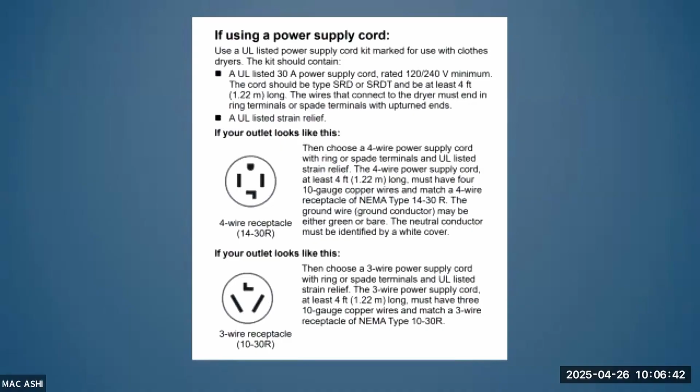Only a 4-inch heavy metal exhaust vent and clamps may be used. Do not use plastic or metal foil. So that's the second time they put it in the directions, that they don't want you to use the plastic or foil vent, which is interesting. I believe the plastic and the foil vent both have a UL listing.

What's that? Is that right? Okay, yeah. So the wrong product. Yeah.

Recommended for best drying performance: avoid crushing and kinking. Must be fully extended and supported. Remove excess to avoid sagging. Sometimes you see these huge serpentine transition ducts, and they don't want you to do that.

Do not install in enclosed walls, ceilings, or floors. So the transition duct, the flexible stuff, shouldn't—there should be rigid material that comes out of the wall or the floor or the ceiling that you're attaching the transition duct to. Do not install in enclosed walls. Total length should not exceed 7 3/4 feet.

So that's kind of interesting. And then a lot of them will have these reductions every time there are 90s and stuff. So this is for that flexible vent, not for the entire system. So you wouldn't see a reduction for this because that's just the flexible vent. But the rigid vent, I think, is 24 feet.

And there's a company out where I am that actually will put a placard on new construction listing the total vent length and the total equivalent length, because they subtract for the 90s. I always love when I see that. We're always flying blind, right? Nobody writes this stuff for us, so we can't figure a lot of things out. So, yeah, go ahead.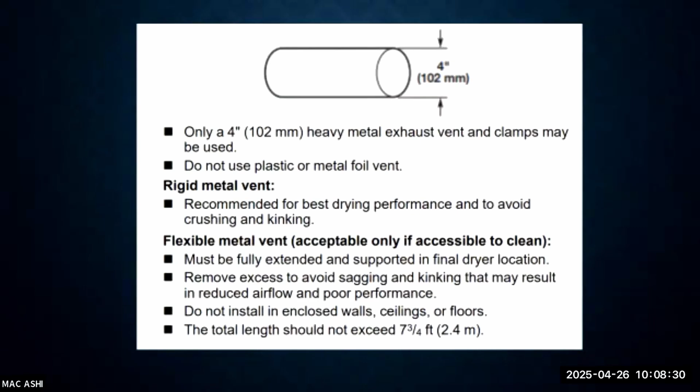I'm also seeing those placards because they're running the dryer vents long, and I see this on new construction mostly. They're saying, oh, we're installing a dryer rated for a higher exhaust vent length. Interesting, and they're putting a little placard for you, so it's got to be posted, so when that dryer gets replaced, the occupant knows. That's really, really good to know. Cool, I love that. I've never seen that.

That's why I like the local knowledge. We'll try to talk about that in my second class here.

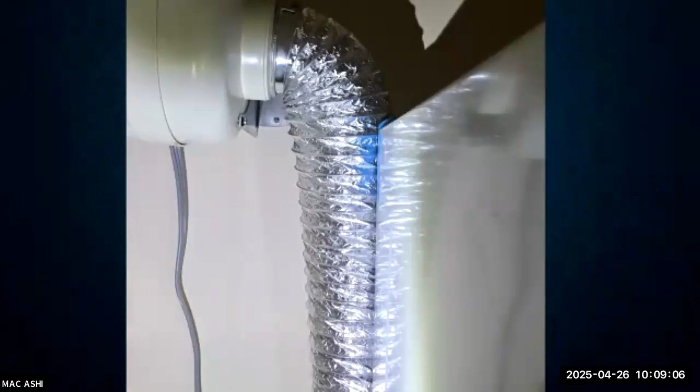So there's the foil stuff that they don't recommend. Notice how that's actually connected to a fan. In condos where I am, sometimes you'll see an additional booster fan with the dryer because they have such a long vent to run, and that's a whole other manufacturer. So now you have three sets of directions for the same thing: an exhaust fan, the foil manufacturer which turns out is for bath fans not for dryers, and the dryer manufacturer. So this stuff can get confusing.

I've also seen at least twice interior dryer vents, these devices that say, oh, don't lose the heat from your dryer out the wall, vent it back into your house. Where did you read that? No, I've seen them, at least twice in inspections, where these boxes mean the dryer vent doesn't go outside at all. It vents directly into the house.

Interesting. I think in places like Mississippi you can vent up into the attic because it would dry the thing out, it's so hot and humid down there. And there would be certain locations in the country where it's so dry you might be able to get away with it. I mean, anybody ever been out to Crested Butte, Colorado? Man, that place is dry. You show up and you have a nosebleed, it's like 10,000 feet, it's so dry. So there would be places you may be able to do that, but not in normal habitable places.

Yeah, they're actually making condensing dryers now where there's no vent. That's right. And that's actually a tricky thing on the code, isn't it? If you're doing new construction and you see a heat pump vent-free dryer, do you look for a vent so that somebody could put one in later? Because if they don't put a vent, then you're stuck with a vent-free dryer. So do you guys say something about that? Kind of, there's another home inspection trap, and you get into some code stuff of whether a vent would actually be required even if you're not using it, so that the next appliance could be.

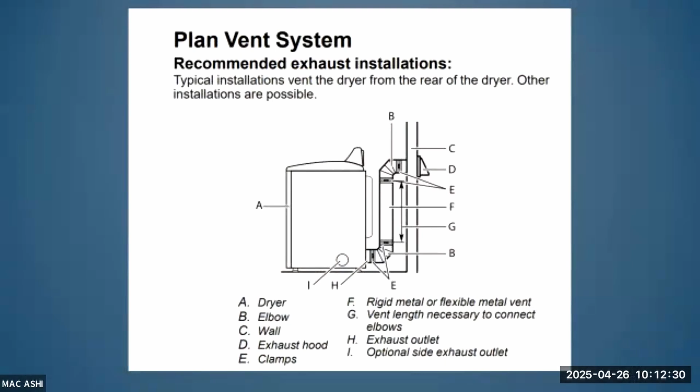So they have a recommended exhaust installation. This is all stuff you can find in the directions. They've got different hoods you can use. Boy, one thing I wish—let's read exhaust hoods. An exhaust hood cap and vent to keep rodents and insects from entering must be at least 12 inches from the ground or any object that may obstruct the exhaust. So that's kind of interesting. How often do you see them right on the ground? So I didn't even think about that, yeah.

Yeah, that's right, it makes a lot of sense with the snow level. But there again, you might not like it on the ground, but now if you read the directions, you've actually got somebody behind you there. Do not use an exhaust hood with a magnetic latch. So that's another kind of interesting one.

Personally, I wish they would outlaw the plastic vents for dryers. Anybody else find that they melt and the backdraft dampers don't work very well quickly? I really like a nice heavy gauge metal dryer exhaust vent. I don't care so much about the bath fans, it seems like they work fine, but I've never found anything that prohibits the use of a plastic dryer exhaust vent cover—though I kind of secretly wish I could find something like that.

Cool, and then they talk about clamps. This always seems like a ripe area for somebody to invent a better way to exhaust a dryer, doesn't it? All those weird bits of metal you have to fit together. Has anybody installed a dryer vent before? It's a total pain to put those together, and you're not supposed to use screws, you're taping these things. Anyway, I wish there was a way to thread them together so they were just better made, but they aren't.

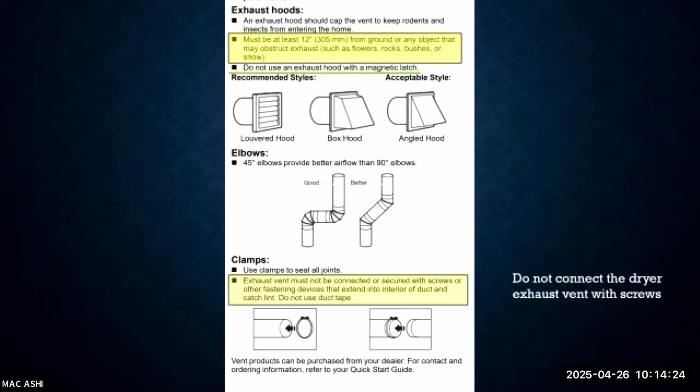So it must be at least 12 inches from the ground. Do not connect the dryer exhaust vent with screws - it says right in the directions.

All right, so venting length you can get in the directions, you can follow this chart below. Do not use vent runs longer than those specified in the Vent System Chart, these will shorten the life of the dryer, reduce performance, resulting in longer dry times and increased energy usage. The vent system chart provides venting requirements that will help achieve the best drying performance.

So, a number of 90-degree elbows - this is the chart I was kind of referring to earlier. If you have none, you can go 64 feet. If you have one, you can have 54. This isn't something you're likely to memorize, but it's also not a bad thing to have built into your report template so you can look it up quickly, because I'm not smart enough to remember this stuff.

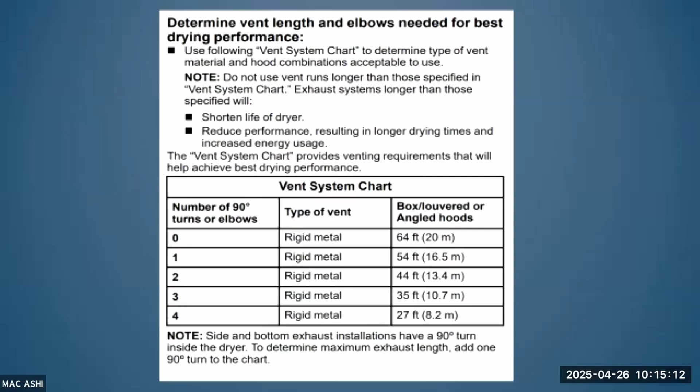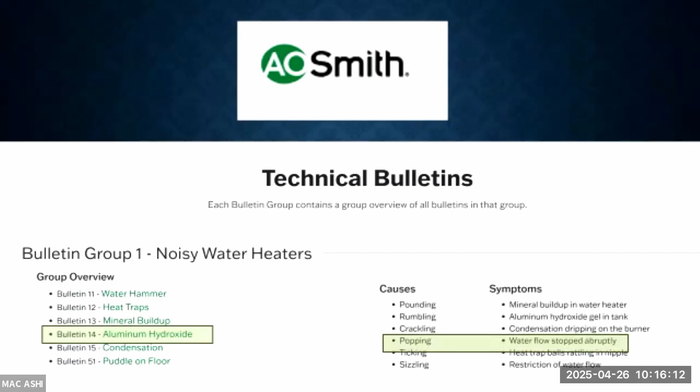Aluminum hydroxide - you'll hear popping. You guys ever hear water heaters that make a weird popping noise? One of the things it could be is aluminum hydroxide. See how they have the sort of crackling, I guess - if there's mineral buildup, you can get a crackling. Heat traps give you a rumbling noise. Water hammer is a pounding. Condensation could be a ticking, probably.

Anyway, you can click on all these things and there's all this information here. Thanks, Hollis. So symptoms: cracking, gurgling, or popping noises from a new water heater caused in a few isolated parts of the United States where the water supply has relatively high pH. Water conditions will react with the aluminum anode to form excessive amounts of aluminum hydroxide on the anode, and in the bottom of the tank aluminum hydroxide looks like jelly beads or green, blue, gray gel.

The substance in the heater to fix - this procedure should only be performed by someone with the ability, blah blah blah. So if the tank is new with no lime buildup, you can turn off the water heater, remove the anode, flush the tank thoroughly with water, and replace the aluminum anode with a magnesium anode. So they're suggesting you get a different type of anode if this problem is happening.

This is what's kind of cool - there's another one I run into where sometimes the hot water smells like sulfur, and the anode, I think, is often responsible. I'll give links to this - you don't have to do this stuff, but to me this is like anticipatory report writing, trying to provide information to get out in front of some of these things so they don't spin their wheels endlessly on it. But it can be complicated stuff to know for sure what's wrong.

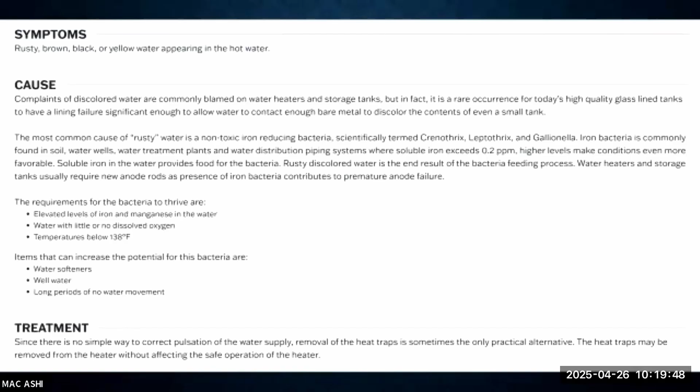When we find, you guys comment on odorous water in the house? I do, and my comment is like, you could start with flushing the pipes. I think one part of my comment is that it can often help to start with the cheapest and easiest solutions and work your way back, right?

If something like this happens, you don't want to replace the water heater to start with. I would try flushing the pipes, and then you could try replacing the anode, and try turning up the water temperature, but sometimes these things can take a while to diagnose.

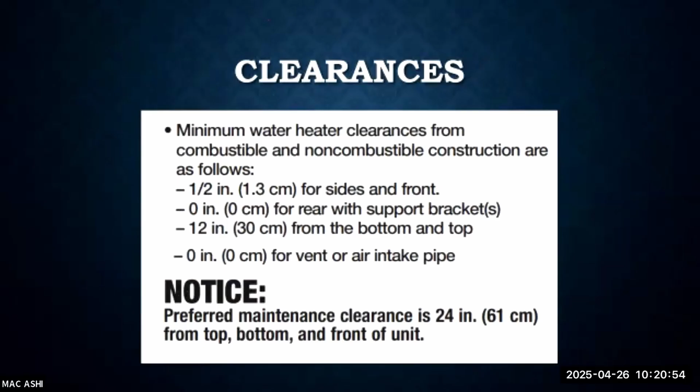So they've got minimum combustible clearances. Really almost none, right? Half inch on the side, zero in the rear, 12 inches from the top and the bottom. Preferred maintenance clearance is 24 inches. Do not install the water heater near vents for heating and cooling unless a minimum clearance of 4 feet is maintained. So whenever you're wondering about clearances, go to the directions, that's where you'll find this stuff.

Clearances to chemicals: the water heater should not be installed near an air supply containing halogenated hydrocarbons where contaminants may enter the combustion air supply. So what if this were near pool equipment or something? That would probably be something to keep in the back of your mind.

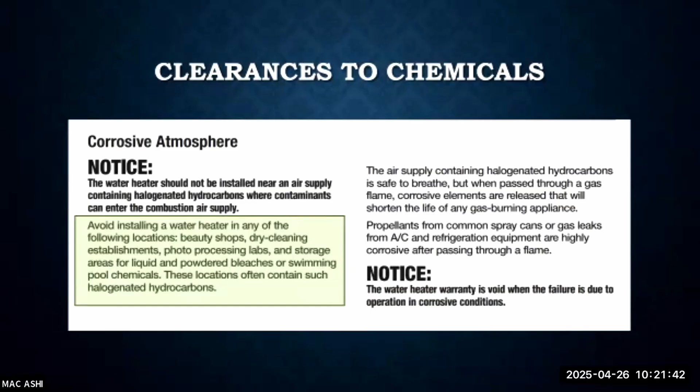Avoid installing a water heater in any of these locations: beauty shops, dry cleaning establishments, photo processing labs, storage areas for liquid or powdered bleaches, or swimming pool chemicals. These locations often contain these hydrocarbons.

Make sure the proper electrical outlet supply, 120 volt, is available or located near the unit. So would it be acceptable to have an extension cord for one of these? No, right? All models come with a 6-foot power cord. Outdoor installations require hard wiring. That's interesting. Consult the instructions in the outdoor conversion kit.

The electrical power supply, 120 volt. A dedicated circuit is recommended for the water heater. Do not connect - so do you guys remember to check that? A dedicated circuit is recommended for the water heater. Do not connect to a GFCI or AFCI circuit.

There's a conundrum, right, especially by modern code. So this is only with Rheem, this is not for all of them. I think Rheem is the only one I found this in. But that was like, whoa, I can't believe that. Like, where would you put this in a new build? And my friend Charlie Buell called them and they said, don't use our equipment.

Fascinating, isn't it? I mean, I hope this is just helpful and inspiring. It's like if you read this stuff, you can end up in these really interesting places that you didn't know existed. And that's the whole point of this class, to try to provoke your curiosity to read directions, because you never know what you're going to find.

So anyway, a dedicated circuit is recommended for the water heater, do not connect to AFCI, GFCI. Wild. So you probably won't see a lot of Rheem water heaters in new buildings until they change that in their directions.

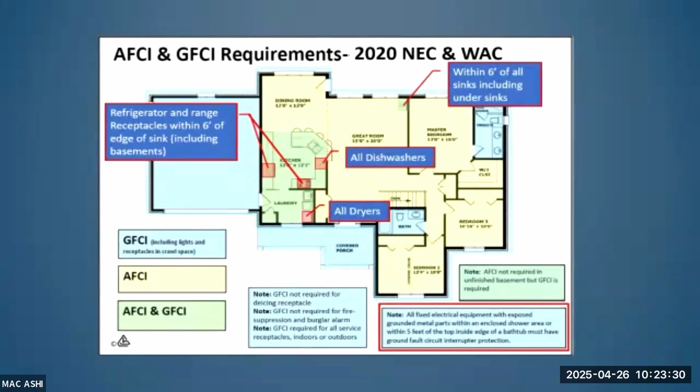This is an illustration Charlie made, amended for WAC for Washington State. Your mileage may vary a little, but basically everything on a new build now is AFCI, GFCI, and there would be really nowhere to install one of these Rheem tankless water heaters that would comply with that. Use of cellular core PVC, CPVC, or Radel in non-metallic venting systems is prohibited, and covering non-metallic vent pipe and fittings with thermal insulation is prohibited. So the cellular core PVC, they don't want you to use on some of these things. That's not universal with that cellular core venting. Unfortunately, it's the manufacturers where you find out whether you're allowed to use cellular core or not.

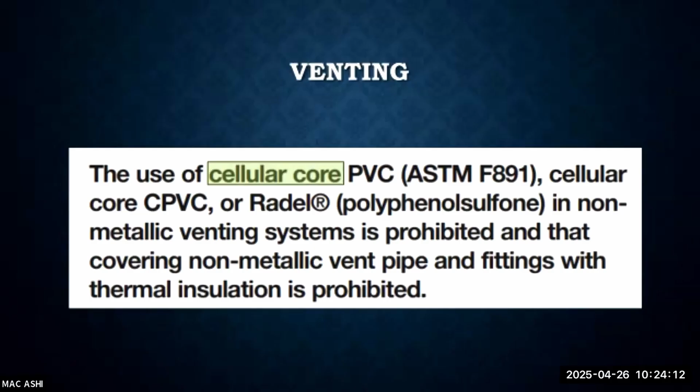So just to finish the thought, guys - did you find this helpful and provocative in a good way? I hope so. The goal was not to say here's how everything should be done, but I wanted to spend a couple hours going through, like, wow, these are all the things you find here. I hope I inspire you to read the directions some, because I don't like reading the directions, and it's complicated and maddening, but if you do it over time it'll help your company - you'll be better, smarter, and more accurate. I've found it very relieving that there's a lot of things to back my opinions in the directions that provide cover for me. So yeah, question or comment in the back?

Do you have any input on the new cartridge filters I'm finding on the floor on the condensate lines, mostly on townhouses? Condensate lines - there's like a plastic box laying on the floor with a filter in it for condensate. For the furnace? Yeah, yeah, that would be one that I could unpack.

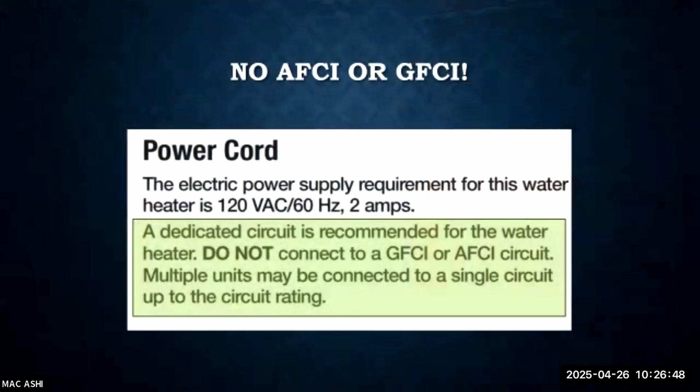So I'd imagine if you asked anybody in this room what the most common issues are for any particular system, we'd probably agree on most things. My question to you would be: what are the most common manufacturers' directions that you find yourself going back to and using more often than others? These ones - I kind of built this class somewhat organically from the things I was just checking when I was doing inspections. I was laughing with Hollis about this, but I feel like I could make this a 10-hour class eventually, because when I'm out I find a question and go look it up. I feel like I could keep adding more and more things, but that's why I put these ones in - the things I was running into in my inspections, which is tricky because you guys out here in Maryland might run into different things than I do.

Anybody else have directions they go to a lot? It sounds like you guys look stuff up, some of you. So I don't know if there's ones in Maryland that you're running into all the time that you're looking up.